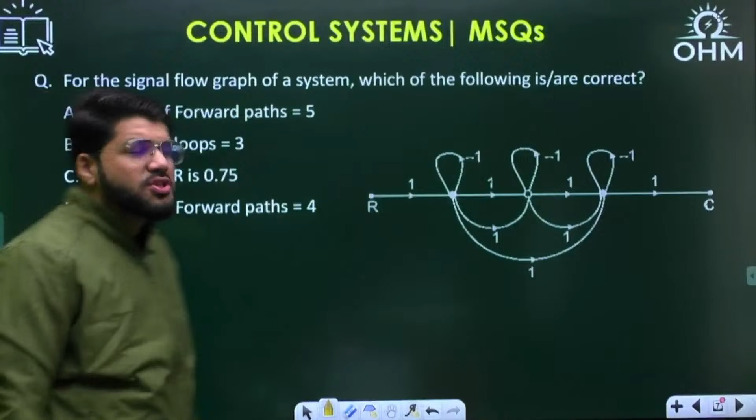For the signal flow graph of a system, which of the following is or are correct? The number of forward paths, the number of loops, and the gain C by R - these are the different parameters discussed in the options. So let us see one by one what are the different number of forward paths.

The different number of forward paths - one of them is quickly the horizontal one, the horizontal path from input to output. Any path from input to the output, you will only travel in the direction of arrows. So any path from input to output is a forward path. Next, to this one branch, to this unit gain branch, there is an alternate. To this also there is an alternate. So let me choose the first alternate, and the second one is horizontal.

Similarly, you can go this way also - these are two more. Rather, I can choose both the alternates only, so this is also the next possibility. This is the fourth one, right? Avinash says fourth, only four. Only four - I can travel through this entire one branch.

This gives me a fifth one also, right? Because that's also in the forward direction only. So the number of forward paths are 5 actually.

Now let's see the other parameters. Loops - how many loops? All these branches are in forward direction, so they will not contribute to the feedback gain. Since all of these are contributing to forward direction, the loop means only there are three loops, and they are self loops only - L1, L2 and L3. So 3 loops and all are self loops, correct? The number of loops is 3.

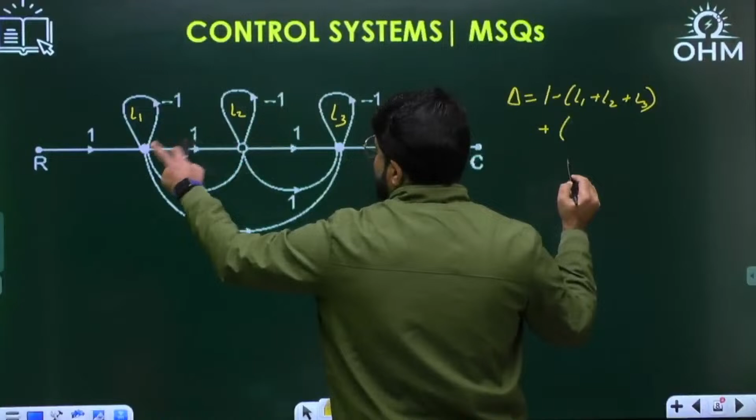Now, all are non-touching to each other. So there are 3 non-touching pairs also: L1-L2, L1-L3 is also non-touching, and L2-L3 are also non-touching. So plus the summation of product of all non-touching loop pairs. Is there a triplet also? Yes, L1, L2, L3 all are non-touching to each other. So there is a triplet, and then alternate plus minus - minus, the products of the triplet term. So there is a triplet L1, L2, L3. This is how you are going to calculate the entire graph determinant.

So this delta will be 1 minus the loop gains, which are minus 1, minus 1, minus 1. So minus 1 into 1, 1 - these product terms will be 1, 1, 1, and minus L1, L2, L3, so minus 1, minus 1, minus 1 is minus 1. So let me see how much it is total: 1 minus minus plus 3, this is also plus 3, and this is also plus 1. The total delta turns out to be 8. The graph determinant turns out to be 8.

Correct? Now path factors - how do we calculate any path factor? Because as per Mason's gain formula, C by R is given by summation of Pk delta K divided by delta. For every forward path, you need to multiply by the respective forward path factor. So how do we calculate any path factor there?

See, you remove that particular forward path. Suppose I erase P1 - suppose this is my first forward path. Let me name the forward paths in this sequence only. Let's say this is 1, 2, 3, 4, 5. Let's write it in this sequence.

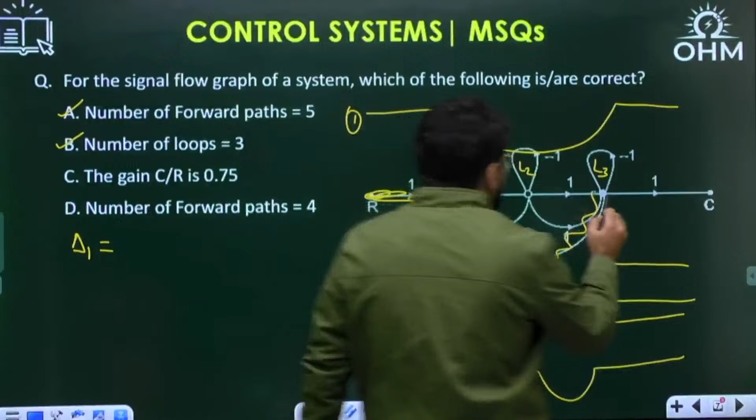So what is going to be the first path factor, delta 1? When I erase this forward path, keep looking with me. Path factor is the determinant of the remaining graph - the remaining graph obtained after deleting that particular forward path. So when I delete it, is there any loop left? Yes, the loop L2 is left. So delta 1 will be 1 minus L2, that is 1 minus minus 1. Delta 1 will be 2.

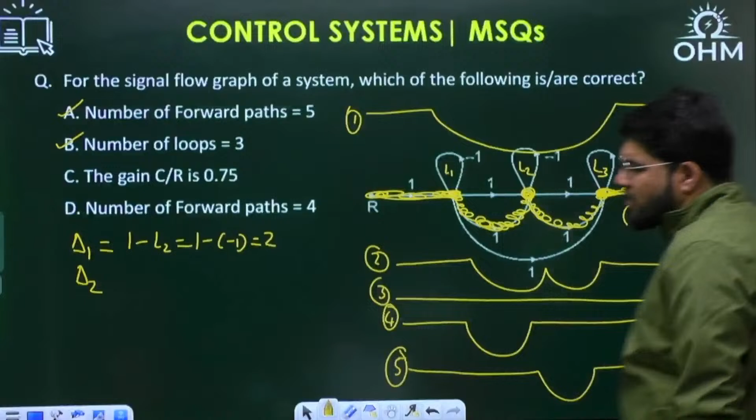Now delta 2 - let me remove this forward path, the second one mentioned here. So when I'm going to remove this, all the loops are now open. These nodes are open means the loops are open. How will the remaining graph be? Something like this - so no loops are closed. If a graph does not have any loop, all the loops are open, then how much is the determinant? 0. So 1 minus 0 - 1 minus sum of loop gains, there are no loops left, so delta 2 will be 1.

Now delta 3 - if I erase this entire horizontal path, then also all the 3 loops are open, so delta 3 will be 1. Delta 4 will also be... now what is delta 4? See here, when I remove this such a forward path.

But ultimately, removing this forward path, L1, L2, L3 all become opens. Their node will go away. So they are open, meaning no loop is left.

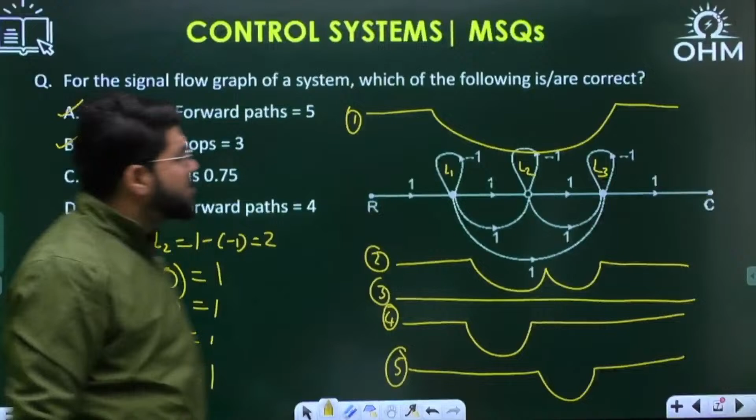Similarly the fifth case also will be 1 only. All the path factors are 1 except the delta 1 case. Whatever the forward paths P1, P2, P3, can we write that down too?

What is my forward path gain P1? It is the product of all the branch gains. Everything is 1 here, so P1 will be 1. Similarly, 1 into 1 into 1 into 1, P2 is also 1. P3, 1 into 1 into 1 into 1, that's also 1. P4 is also 1. P5 is also 1. The values given here are simpler.

So what I need to do is go and substitute here: summation Pk delta k divided by delta. First forward path is 1, all forward paths are 1. Only delta 1 is equal to 2.

The next deltas are also 1, so 1 into 1, 1 into 1, this is the fourth one, this is the fifth one, divided by the value of delta, which is 8. So total answer is 2 plus 4, 6. 6 by 8 is 0.75.

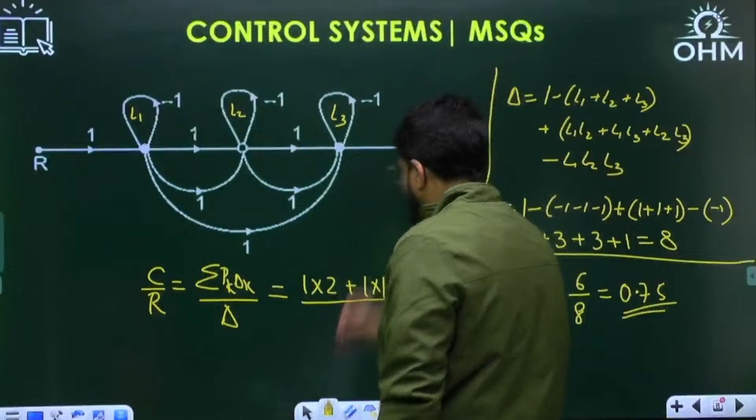0.75, correct, yes Avinash, correct. So the total gain C by R is 0.75. Option number C is correct. Option A, B, C all correct.

Considering this is an MSQ, 3 options are correct here: option A, B, C. Just a little info. The 3 options are correct here. Okay, let us go to the next question then.

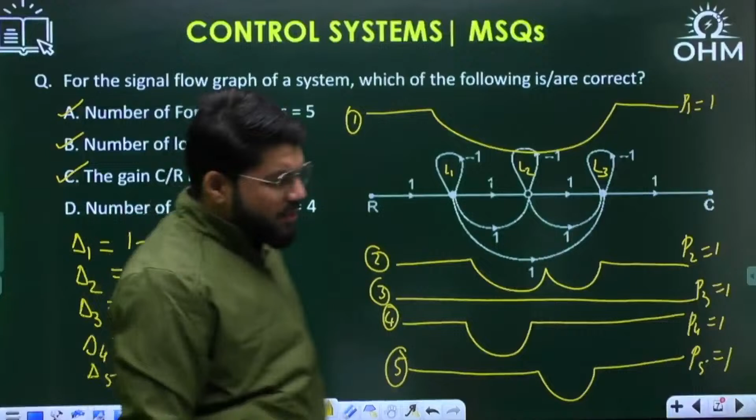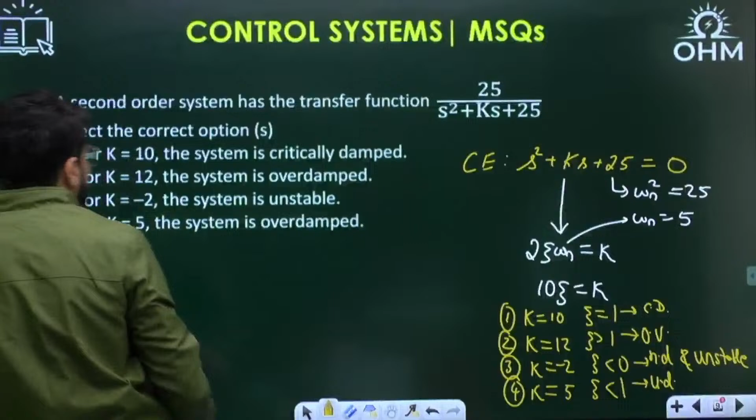Fourth, k equal to how much? 5. K is 5, so zeta is less than 1, positive but less than 1, so it is going to be under damped, not over damped. So again ABC, 3 options are correct here.

Yes, correct answer for this, just a little info, Avinash again. 3 options ABC are correct here. Next question, let's move ahead to the next question here.

Two linear time invariant systems with the transfer functions G1s and G2s are given. They have the unit step responses y1t and y2t respectively. Which of the following statements is or are true?

Dinesh, ABC correct answer. I know one or two GATE MSQs also I have included, just to show you the nature of the control systems MSQs that have come up in recent 2-3 years.

This is a GATE 2022, 2 marks question. There are two transfer functions given, G1(s) and G2(s), with step responses y1 and y2. The options ask: do they have the same percentage overshoot? We know percentage overshoot depends only on zeta. Do they have the same steady state value? Do they have the same damped frequency of oscillation, omega d? And do they have the same 2% settling time?

So what are these formulas? They have the same percentage peak overshoot, which depends only on zeta. The formula is e power minus pi cot phi into 100, where cot phi depends only on zeta. Or equivalently, e power minus pi zeta upon root 1 minus zeta square. Both ways I have written the formula for you now.

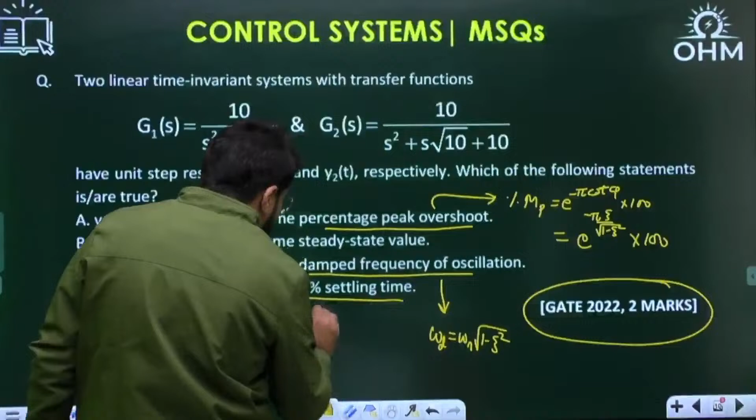They have the same 2% settling time. What is that settling time formula? If it is underdamped, let me check whether it should be underdamped or critically damped. Accordingly, 2-3 different cases I have given to you. Let me start solving it now, and then I'll talk about the steady state value also.

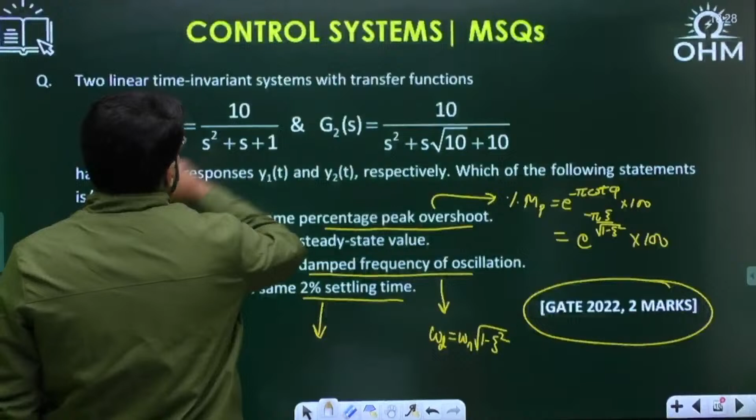So first one, let's talk about G1(s). Taking the transfer function: 10 upon s square plus s plus 1. So omega n square is 1, omega n is 1. And what is zeta? 2 zeta into omega n is 1, so zeta is 1 by 2.

Now coming to G2(s), which is given as 10 upon s square plus s root 10 plus 10. Now omega n square is 10 here, so omega n definitely for both of them is different. Omega n is root 10. And then 2 zeta omega n is root 10, that means zeta is 1 by 2. Same zeta, right? Same zeta.

Both of these zetas are positive and less than 1, meaning underdamped response for both. So I can write down the settling time formula. For underdamped, we know it is 4 by zeta omega n.

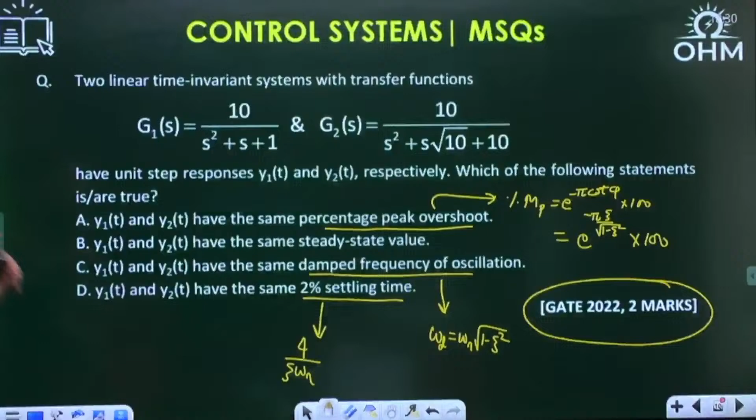Now, do they have the same steady state value? Normally if you express the transfer function in the standard form - omega n square upon s square plus 2 zeta omega n s plus omega n square - the standard second order transfer function, then it has steady state value 1, as we have seen yesterday. But if you express it as k into omega n square, then it will have steady state value equal to k times 1. If you multiply the transfer function by k, the steady state value will also be multiplied by k.

Okay, so omega n square here is 1, and this is 10 into omega n square. So the steady state value of this will be 10 - you can find it by final value theorem, but I'll directly say it is 10. And this one, omega n square is also 10, so this is 1 into omega n square, and for the second case, steady state value is 1. So even the steady state value will not be the same.

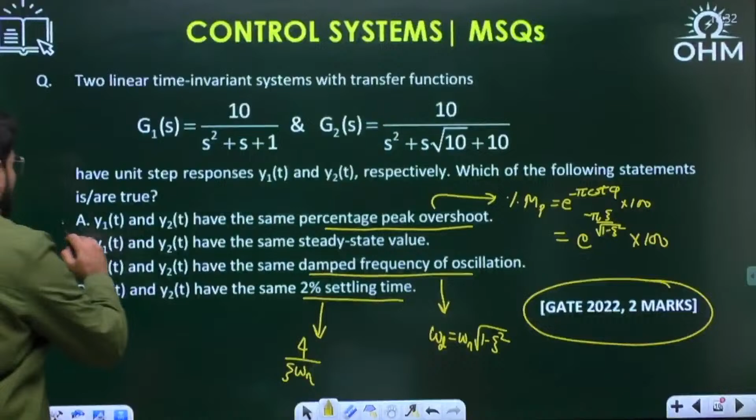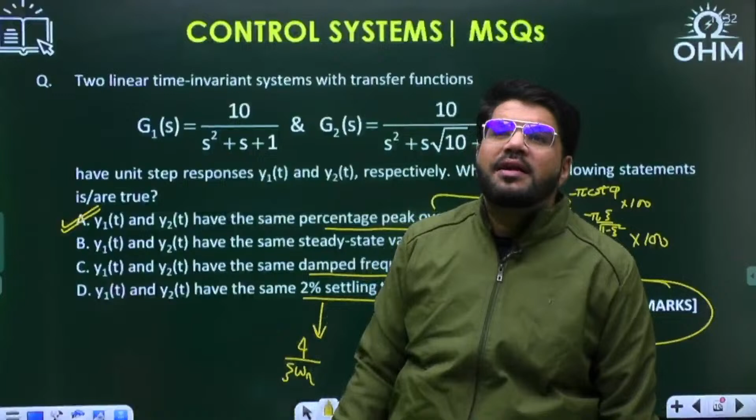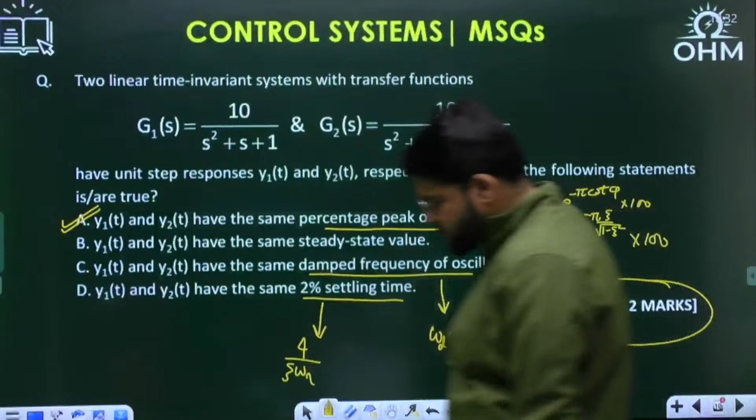So only option A. Although it is MSQ, but what is MSQ? We have seen multiple select questions where they clearly say one or more than one can be correct. Only one correct is also acceptable. Even in the mathematics MSQ class where I was taking GATE mathematics MSQ, I showed you some 2-3 cases where they called it an MSQ question, but only one option was correct. So be ready, don't be puzzled - even in your exam, you may get only one option correct for MSQ. MCQ has a fixed one option correct. MSQ, anything can happen - one correct, two correct, three correct, or all four correct.

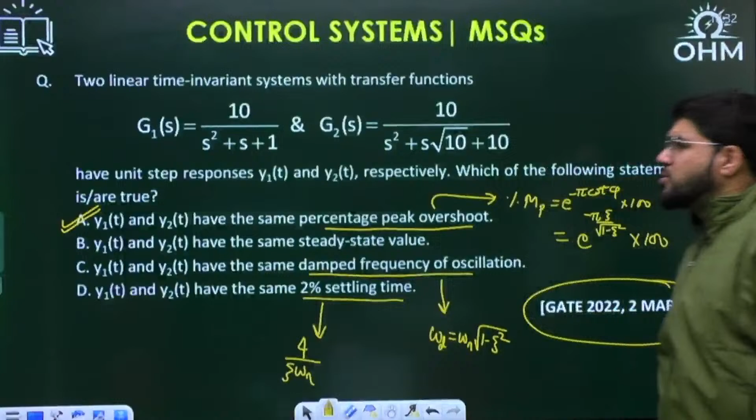Then let's move ahead to the next question - the open loop transfer functions. Yes, Kadiam and Joshna, Dinesh, Lil Info, Murli - correct answer all of you, A. Only A.

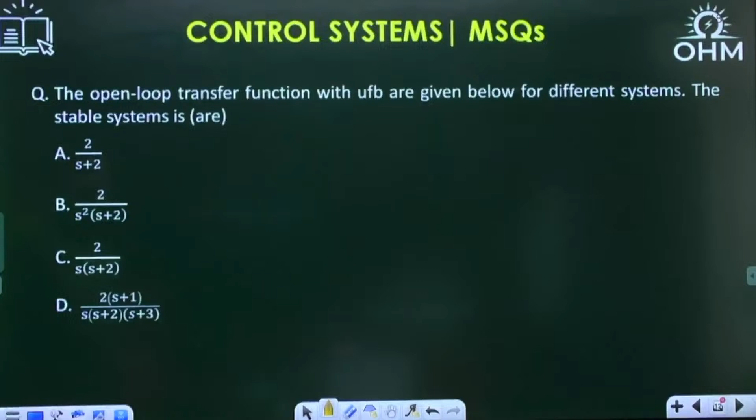So the open loop transfer functions with unity feedback are given below. Which of the systems are stable? See, open loop transfer function normally is G(s)H(s), but what is H(s) given here? Unity feedback - that means the open loop transfer function given here is G(s). So one by one, if I start taking the characteristic equation.

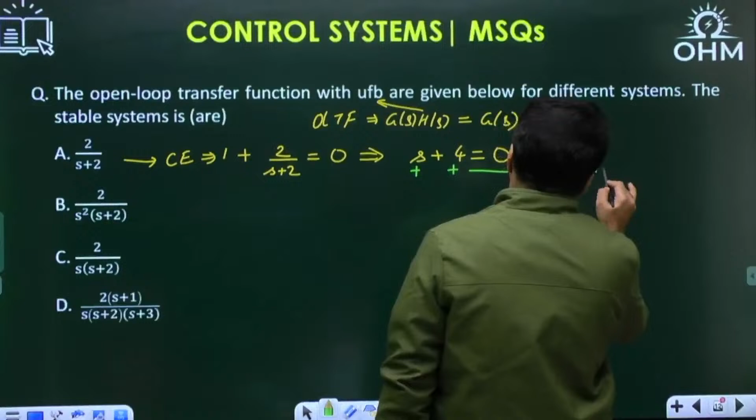Characteristic equation means 1 plus G(s)H(s). So 1 plus 2 upon S plus 2 equal to 0. First order system - when you simplify, S plus 2 plus 2, S plus 4 equal to 0. Is this going to be stable? For first order and second order, what we discussed yesterday in Routh-Hurwitz also - if all coefficients are of the same sign, then the system is stable. Nothing to wonder, right? Plus, plus - same sign. Or you can directly calculate the root. Now what is the root? Minus 4 - that is LHP, so stable. So A is stable.

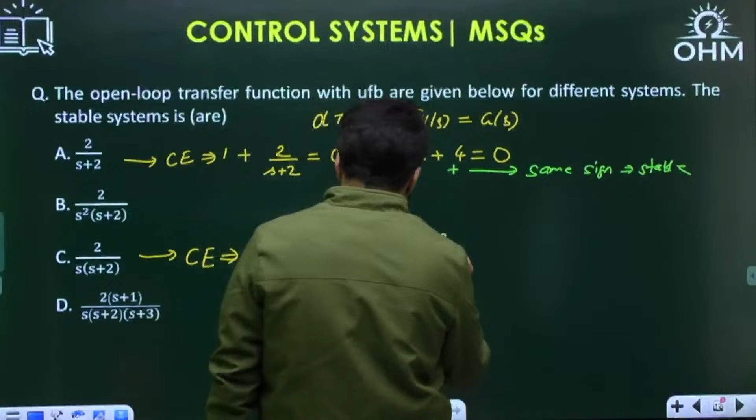Which of them are stable? It's a multiple select question again. Let me go to option C first. So what is the characteristic equation for option C? It is 1 plus 2 divided by S(S plus 2) equal to 0. So S square plus 2S plus 2 equal to 0. Again, second order system, all coefficients plus - for first and second order, all coefficients of same sign is the necessary and sufficient condition. All are of the same sign. Stable, so C is also stable. Or you can check that zeta is positive, so the system is stable - that also you can say.

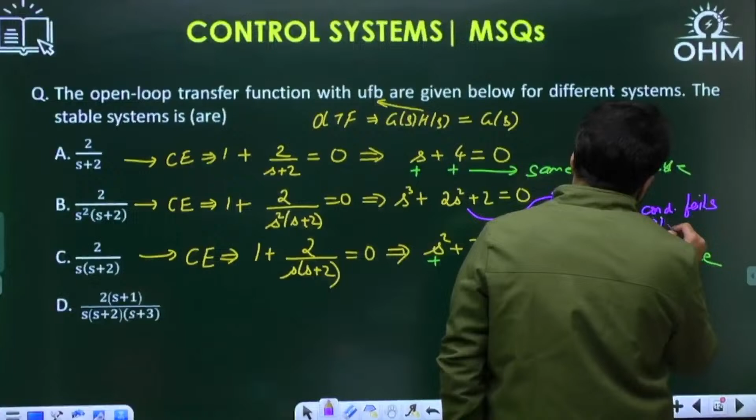Now coming to option B, what is my characteristic equation? 1 plus G(s)H(s), that is 1 plus 2 upon S square(S plus 2) equal to 0. So S cube plus 2S square plus 2 equal to 0. Now you see here the catch is the S power 1 term is missing. If it is missing, that means it has a 0 coefficient. All coefficients strictly of the same sign is required. So what happens if an S power term is missing? Here the S power 1 term is missing, and if it's missing, what will I say? That the necessary condition itself fails. System cannot be stable. So B is not in our list.

See, Avinash says there are two poles of the open loop transfer function - but that is not, I think, the correct way to finally conclude. There are two poles at origin, but of the open loop transfer function, and we need to comment on the stability of the closed loop transfer function.

Right, so take care of that. Now the characteristic equation for the fourth option: 1 plus twice of s plus 1 upon s, plus 2, s plus 3 equal to 0.

Solving this, I should be getting s cube plus 2 plus 3, 5 s square plus 2 into 3, 6s, then plus 2s plus 2 equal to 0. So overall, s cube plus 5s square plus 8s plus 2 equal to 0.

All coefficients are of the same sign? Yes, but this is higher order. Same sign, that means what will I say here? Only necessary condition is met.

Only necessary condition is true. But whether the system is stable or not, for higher order system, we need the sufficient condition in the form of Routh-Hurwitz, or the cubic shortcut.

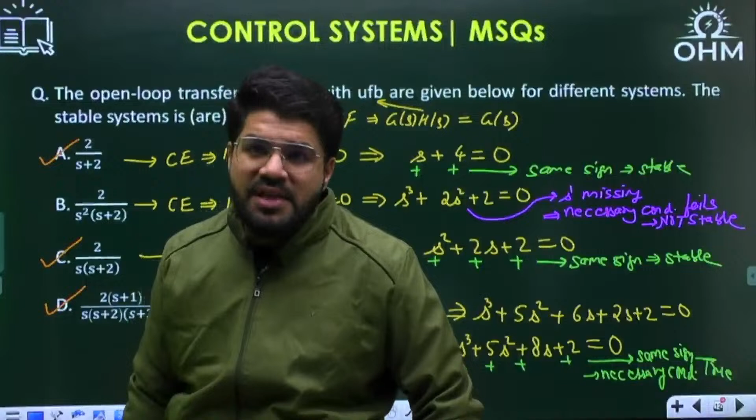If the necessary condition fails, then no need for confirmation from RH. We can say that system cannot be stable if the necessary condition fails. What is that necessary condition? All the coefficients must be of same sign, strictly same sign. If all positive means positive, not even 0. S power 1 term missing means its coefficient is 0, that's what I would say, correct?

Next question. Given the characteristic equation, s power 5 plus 2s power 4 plus 24s cube plus 48s square minus 25s minus 50 equal to 0, fifth order equation.

The number of roots in the right half is 0, right half is 1. The number of roots on imaginary axis is 2. The number of roots in the left half of S plane is 3. Which of the option is correct?

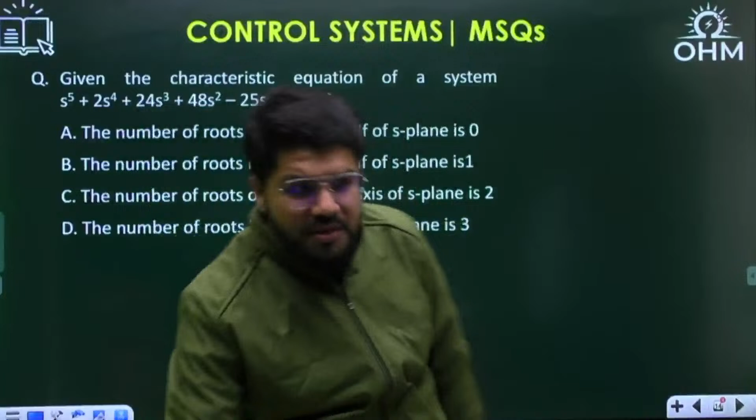Something similar to this I have solved in yesterday's marathon also. Please complete this quickly, guys. Please complete this one quickly.

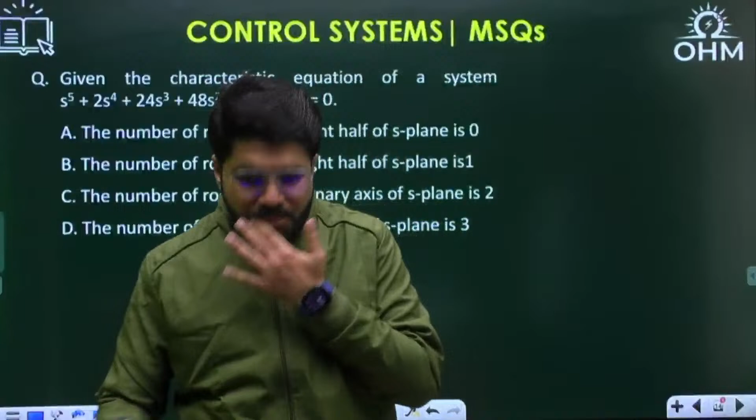Okay, let us check the next answer then.

Fine, so let us form the Routh-Hurwitz first of all, fifth order equation, and let us see what case of Routh is coming up here.

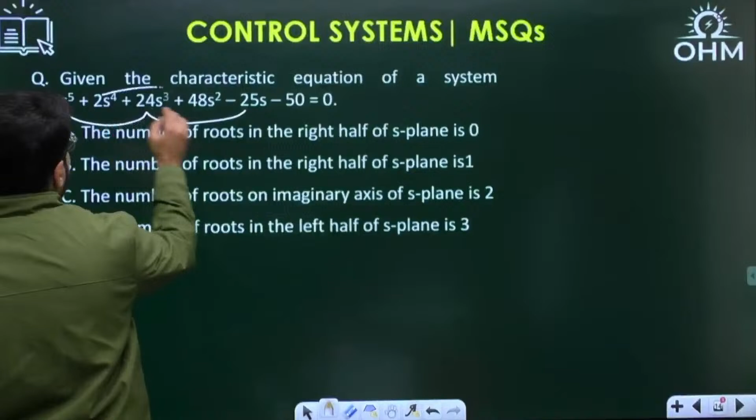Starting with the first two rows, s power 5 and s power 4. S power 5 coefficients: 1, then 24, and minus 25. And then alternate coefficients s power 4: 2, 48, and minus 50.

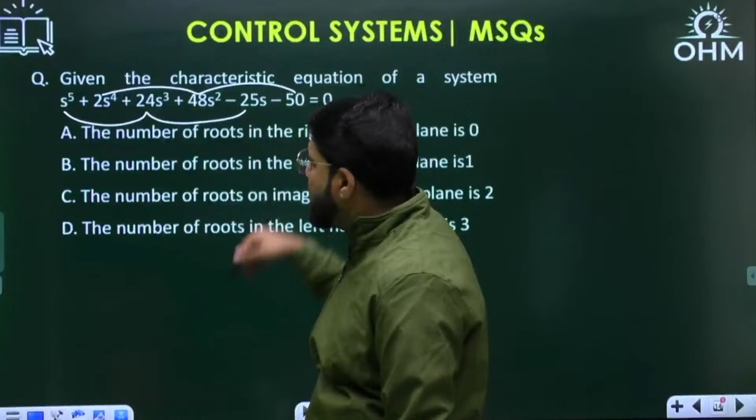So s power 3, see dear, if they are asking about, suppose if they only want the comments on stability, what will you say? You can directly say that all coefficients are not of the same sign, system cannot be stable, necessary condition fails. But I need here actually quantity of roots in the LHP or RHP, so I will go to the Routh-Hurwitz.

I'll have to solve the Routh-Hurwitz. So now s cube row: 2 into 24, 48 minus 48, 0. 2 into minus 25 is minus 50, again minus of minus 50, 0. Last element of a row always 0. So what do you get?

Okay, this is the important case of RH, as I told you, a row of zeros. And whenever there is a row of zeros, we form the auxiliary equation using the row above the row of zeros.

2s raised to the power 4 plus 48s square minus 50 equal to 0. Let me differentiate this. So 8s cube plus 96s equal to 0.

So what is the modified s power 3 row? From the auxiliary equation, we write down the modified s power 3 row. What are the coefficients of s power 3 now? That is obtained from the derivative equation: 8 and 96 and 0.

Now continue with the Routh-Hurwitz in the similar manner. So now s square row will be required. This is now eliminated, don't use the coefficients here. This is replaced: 8 into 48 minus 2.

If you want, you can take 8 common, but let's keep solving. 8 into 48 by 8 anyway will be cancelled. So 48 minus this one, 48 minus 24, correct? 2 into 96 by 8 is 12, so it's going to be 24. 8 into minus 50 by 8: this is minus 50 and this is 0.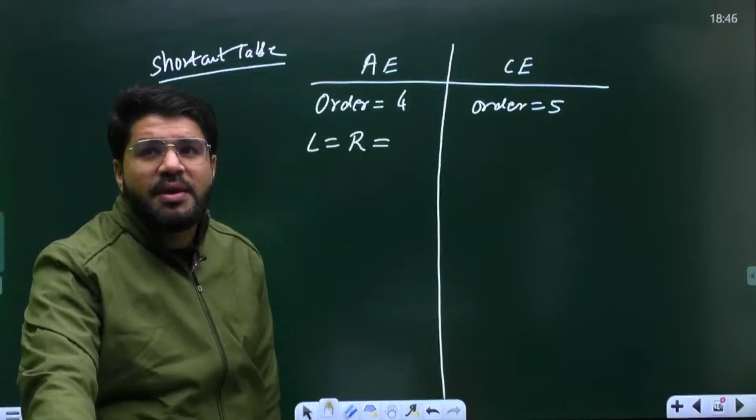For the auxiliary equation, always the number of LHP and RHP roots are same, and equal to the number of sign changes below the auxiliary equation. So in this part, how many sign changes? One sign change.

So in this part, we have one sign change. So L and R are equal and equal to 1. So how many on j omega? Because if there is any j omega root, that is because of the auxiliary equation only. The auxiliary equation is 4th order: one root goes to the LHP, one goes to the RHP. How many left? 2. Now for the characteristic equation, how many RHP roots?

Sequence: first write down R, then j omega, then L. R means the total number of sign changes in the first column. The total number of sign changes overall from top to bottom is also only one sign change. So R is 1.

J omega roots are 2, and L is equal to then 5 minus 1 on the RHP, 2 on the j omega, so LHP roots will be... 5 minus 3, the LHP roots will be 2. And because there are RHP roots, the system is unstable.

Now anyway, let's come and conclude our options. Number of roots on the RHP, 0 or 1? 1. Option B, A is wrong. Number of roots on imaginary axis, 2? Correct, there is a pair. And number of roots in the left half then is 2.

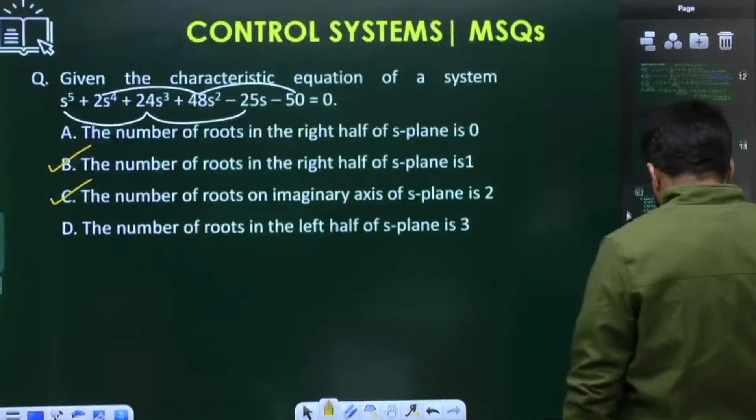So D is wrong. B and C. Yes, B and C correct answer. Right, correct answer B and C. The final correct answer is B and C. Okay, fine.

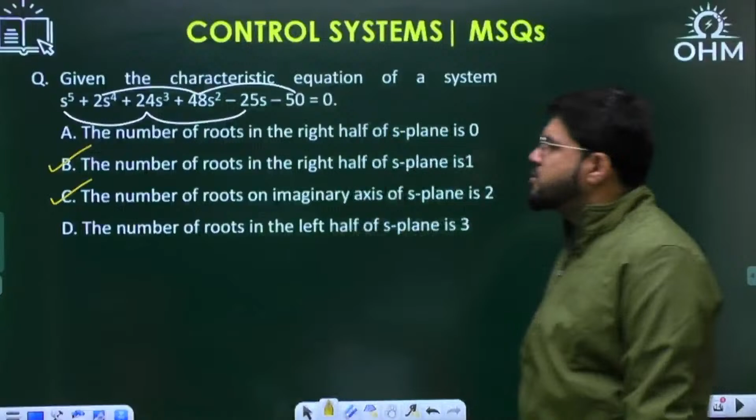Next one. Consider the Bode plot of a minimum phase unity feedback system shown in the figure. Which of the following is or are true? A question on Bode plot of a minimum phase unity feedback system is shown in the figure. Which of the following is or are true?

The steady state error corresponding to the ramp input is 0.25. The gain crossover frequency is 1.4. The final phase of the system is minus 180 degrees. The velocity error coefficient is 2.

Let's check this: the steady state error corresponding to ramp input. If you look into the initial slope of the Bode plot, it is minus 20n if there are poles at origin. It is given as minus 20, so that means n equal to 1. What is this n? This is the one pole at origin.

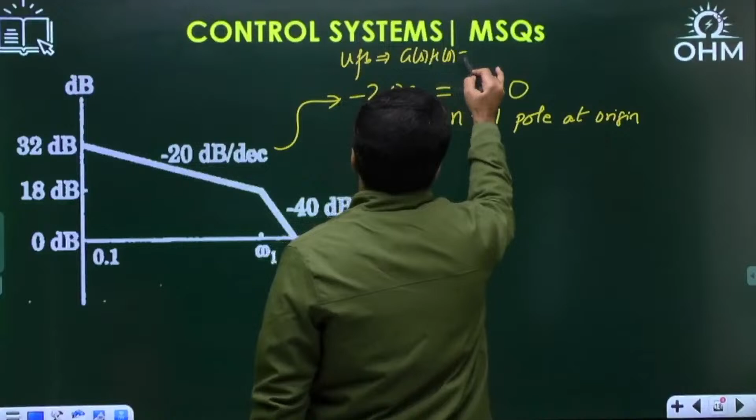Because the system is mentioned to be unity feedback, what is the open loop transfer function? Open loop transfer function GSHS is just GS, since it is a unity feedback system. That means this is one pole of GS at origin, and the number of poles of GS at origin is type 1.

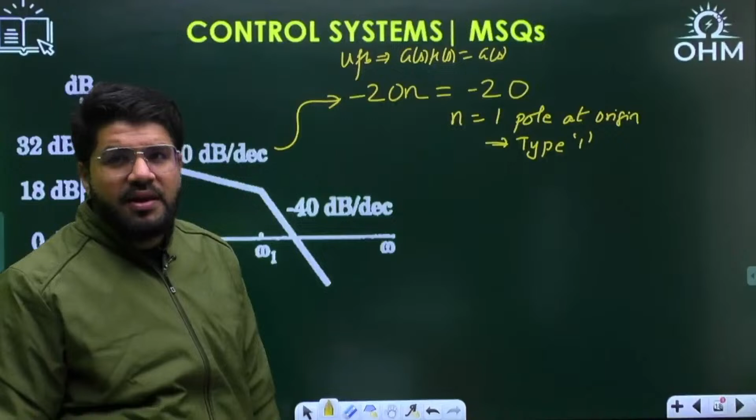Number of poles of GS at origin is known as the type of the system. Type is defined for unity feedback. We discussed the error analysis also yesterday in the marathon session. It is type 1. For type 1 steady state error, if they ask for step, it's 0. If they ask for ramp, we know that type 1 will go with ramp, and for ramp we will get some finite non-zero answer given by 1 upon kV.

If they ask it for parabolic, they can ask it for anything - for parabolic, it will be infinity. So we know these straightforward conclusions: if they ask for step or parabolic, we need not calculate. I think they have asked for ramp, and steady state error for ramp is 1 upon kV.

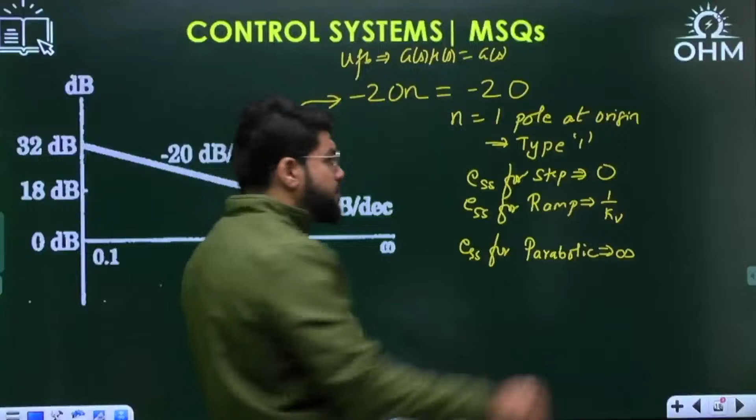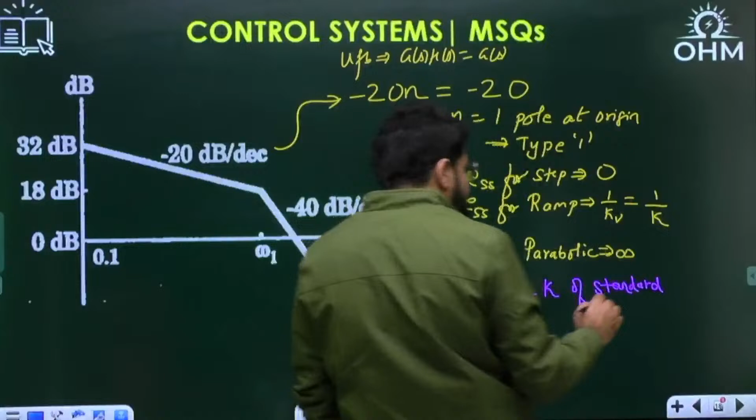kV equal to k - remember always, kV equal to the k of the standard form. And from the Bode plot, we will always write down the standard transfer function. Standard means time constant form.

Let us see what is the value of k from the Bode plot. How do you calculate the value of k from the Bode plot? There are two ways to calculate the value of k from the Bode plot.

Method number 1: initial part formula. Initial part means the part up to the first corner frequency. What is the initial part formula of the Bode plot? The initial part formula of the Bode plot is given by minus 20n log omega plus 20 log k. That is the initial part formula.

Initial part means up to the first corner frequency, that is, up to omega less than or equal to omega 1, the first corner frequency. What is given to me is at frequency 0.1, magnitude is 32. Use omega equal to 0.1 and magnitude given as 32, n is already highlighted as 1. So 32 is equal to minus 20 log of 0.1 plus 20 log of k. Log of 0.1 will be minus 1, so minus becomes plus 20, and then plus 20 log k. So 20 log k is turning out to be 12. You solve it, k will be roughly equal to 4.

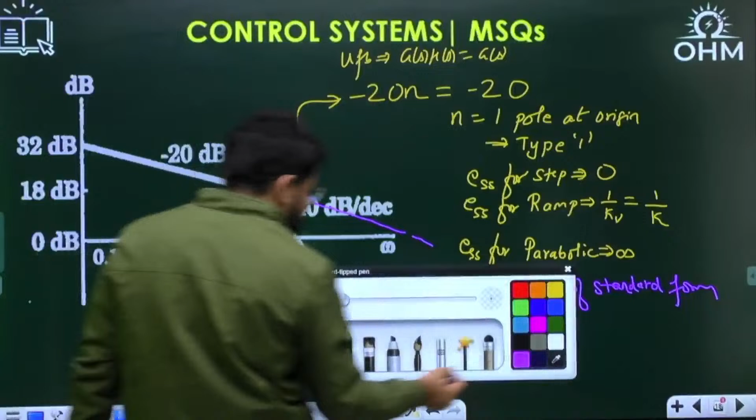If this initial part was extended, if there was no slope change, then it can go and cut the 0 dB axis. So what is this omega equal to? What is this omega equal to?

At the 0 dB axis, you can find this using the concept of slope. What is the slope of this line? Minus 20. The slope of the line is minus 20. What is the slope of any line? Change in the y coordinate.

Y coordinate here is magnitude. Change in the magnitude, M2 minus M1. In any Bode plot formula, you use slope as change in y coordinate, meaning change in the decibel magnitude, over change in x coordinate. Since we plot the Bode plot with respect to log omega, it's log omega 2 minus log omega 1.

This is the slope formula to be used. So if you use it for the minus 20 line with slope minus 20, how much is the change in magnitude? 0 minus 32.

And then change in log of frequency. This is log omega. Let me call it some frequency omega, so it's log omega minus the first frequency. This is the first point I'm using, the frequency here is log of 0.1. Let us call this point A, and this was point B. So I have used the section of the line AB.

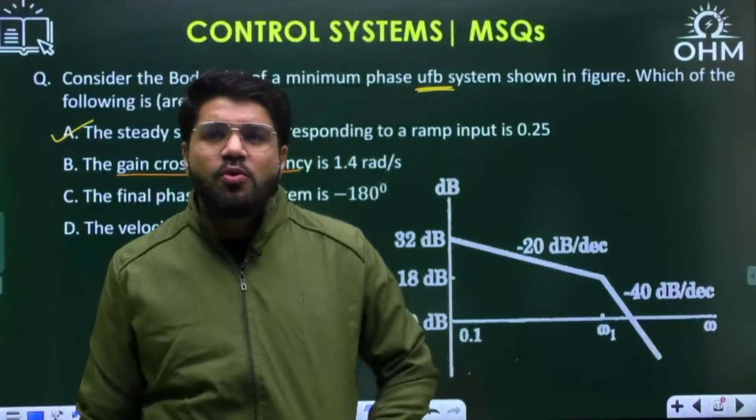Let me first find omega g. What is omega g? Let me first locate omega g within this diagram. It is the gain crossover frequency, the frequency at which the magnitude of gj omega hj omega equals 1, or in decibels. We know that at omega g, mod gj omega hj omega is where the Nyquist plot intersects the unit circle.

In decibels, how much does it become? In decibels, you have 20 log of the magnitude, magnitude 1, and log 1 is 0. So what is omega g? It is the frequency at which the magnitude becomes 0 dB. So where does the actual magnitude become 0 dB? Let me highlight here: this is omega g, this is the actual magnitude plot, where the magnitude becomes 0 dB at this frequency. This is omega g, at this frequency.

So again, going by the slope concept here.

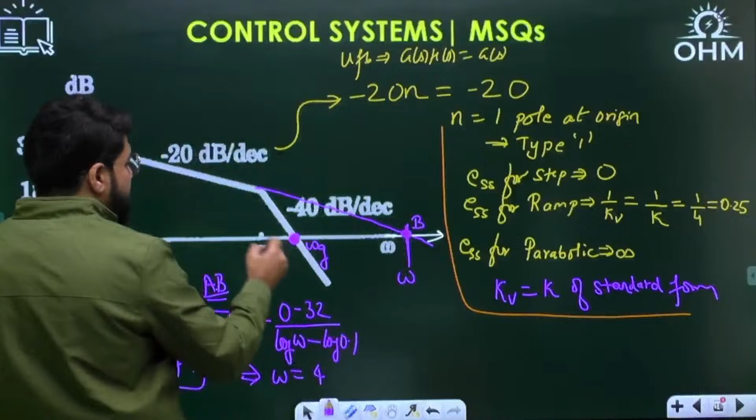This is omega g. So now which line to be used? This was named as B already. Let me name this as some point C. Okay, so use the line CB now. Sorry, C and D, not CB. B is not relevant here. Let's take these 2 points, that is CD, C and D.

But for that I will need omega 1 also. One more effort will be required. We cannot directly find omega g. So 2 calculations will be required here. Little bit calculative it is.

So first I will have to go to AC. Using AC I will first find omega 1. If I go to AC, see how much is the slope for AC? For AC the slope is initial slope only, minus 20. Change in magnitude, this is given. How much is this magnitude?

This is 18. So change in magnitude 18 minus 32, divided by log omega 1 minus log of 0.1. Let me see how much this answer is turning out to be. This is 0.5, just calculations you can do now. So this omega 1 is coming out to be 0.5.

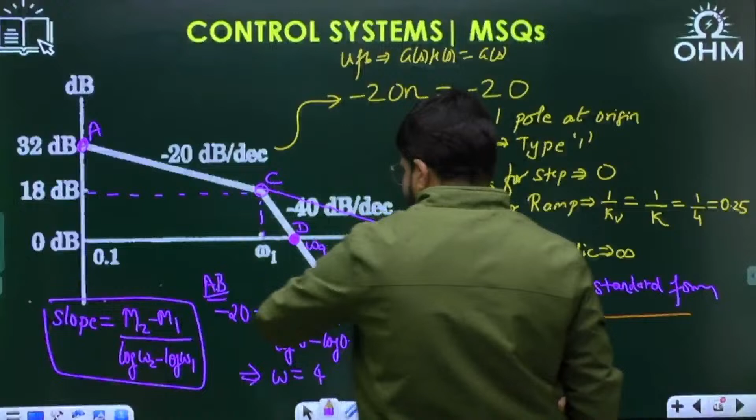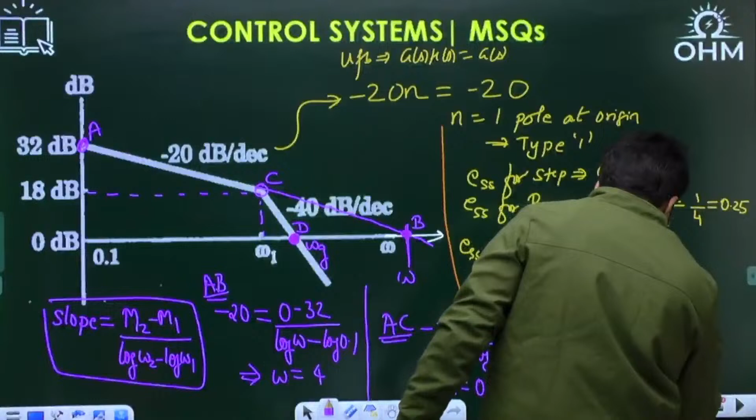Now I will go to CD. The slope is minus 40. Change in magnitude 0 minus 18, divided by change in log of frequency, that is log of omega g minus log of omega 1. Omega 1 is 0.5, log of 0.5. So this was also indirectly required, omega 1, which I have calculated.

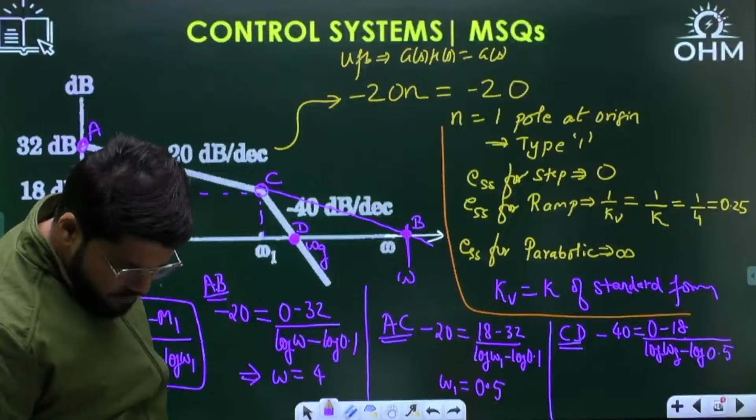Omega g is approximately 1.4. Correct, so B is also correct.

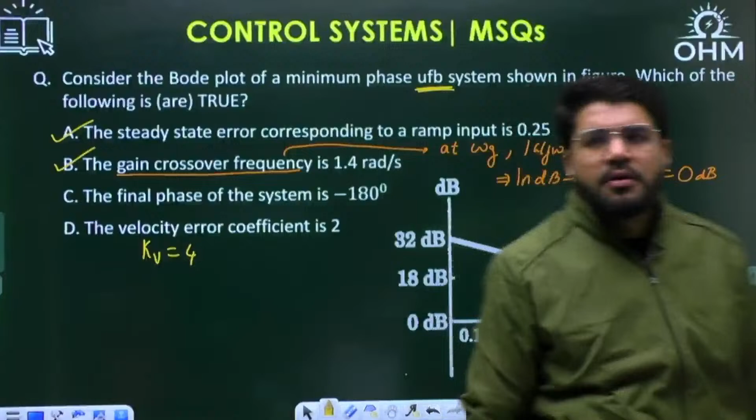So the correct answer here is B also. And then we are left with C.

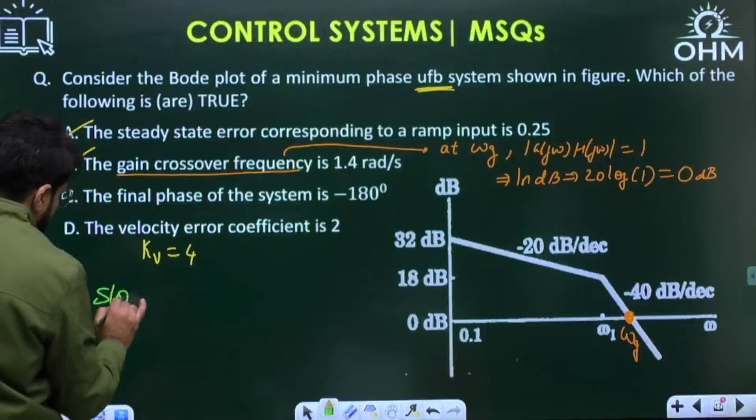Final phase is a simple task only, because what is the final slope? It is given to be minimum phase system. The final slope is always, whether minimum or non-minimum phase, minus 20 into P minus Z of the Bode plot, which is shown here as minus 40. So what is the value of P minus Z is equal to 2.

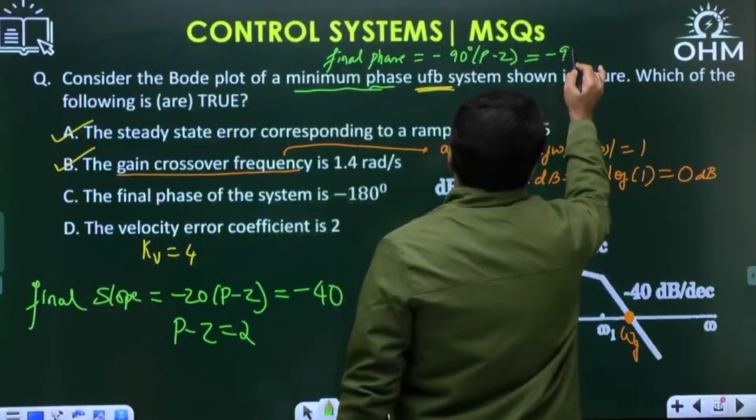Now for a minimum phase system, final phase is given by minus 90 degree into P minus Z. So P minus Z is already obtained as 2, so minus 180 degree. So yes, final phase is minus 180 degree, so C also correct. A, B, C all 3 correct. Just recheck, B is also getting to be correct only. A, B, C, 3 options are correct.

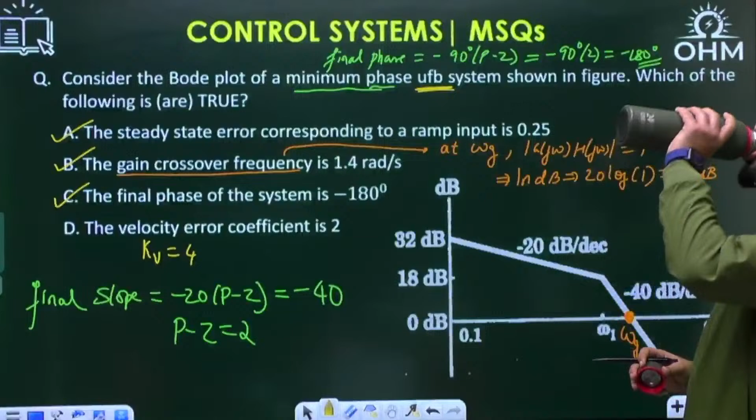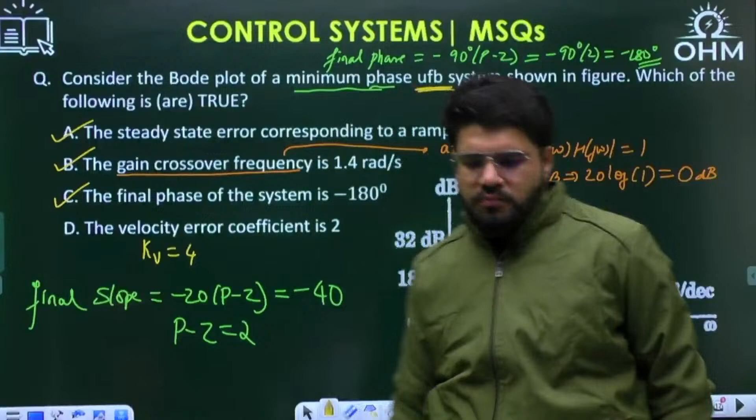Next question. The asymptotic Bode magnitude plot, another one, is shown. It is a type 2 system. It has 2 poles and it has 2 zeros and 3 poles. Final transfer function also they are asking, and there are 3 poles at the corner frequency omega equal to 10. Let's check it.

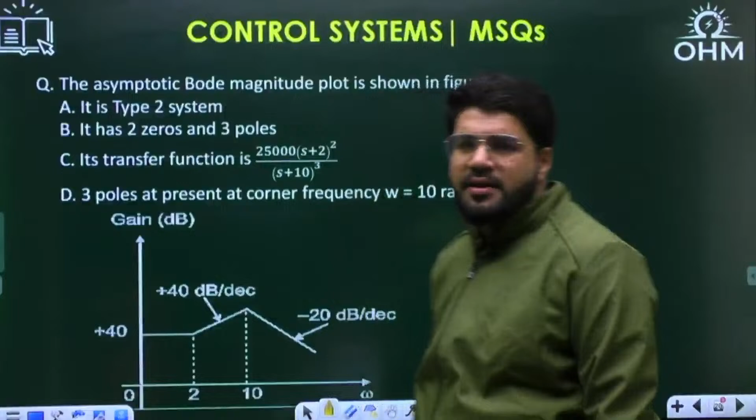First of all, it is definitely not a type 2 system. The asymptotic Bode magnitude plot for unity feedback system, let me be more specific in the question. For unity feedback system is shown. Now see, what is the initial slope?

You talk about this portion, and what is the initial slope? The slope is 0 because the line is parallel to the x-axis. Initial slope 0, and if initial slope is 0, n equal to 0, pole at origin. There is no pole at origin or neither zero at origin. There is no pole or no zero at origin. Let me not only say pole, because initial slope positive means zero at origin.

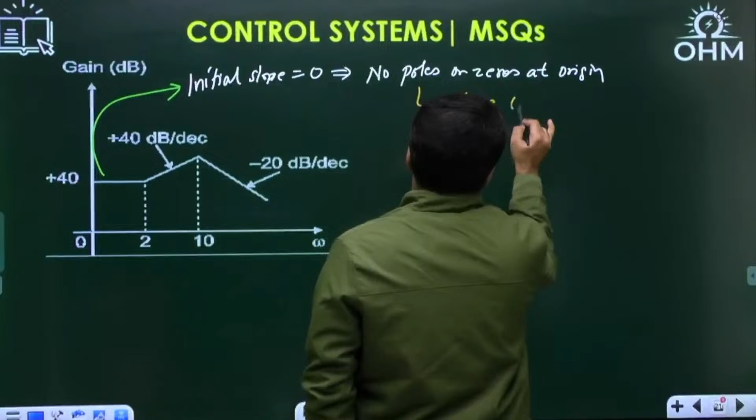Initial slope 0, that means no poles or zeros at origin. So at origin there is nothing, no pole or zero. But no pole at 0 indicates type 0. So it is definitely not type 2. This is wrong.

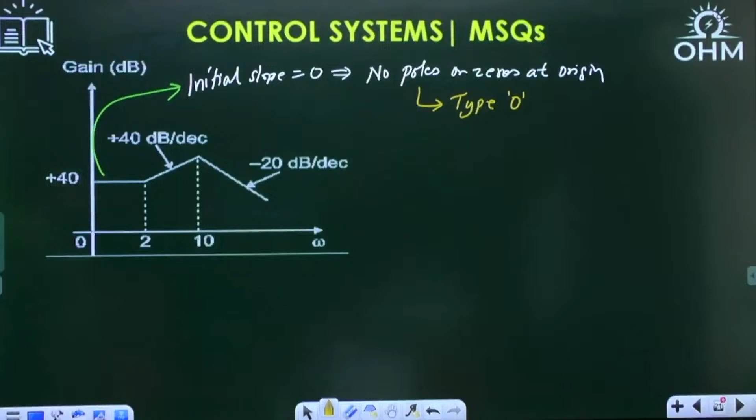Now what are my slope change points? This is the first point where slope will change, and slope becomes positive. A positive change of slope is due to a zero. Due to a single zero, slope changes by 20. But due to 2 zeros, slope change can occur by 40, the slope changes 40 decibel per decade. So we will have 2 zeros here.

2 zeros at what corner frequency? Corner frequency will be 2. Then how much is the slope change here? 40 to minus 20, see, slope change will matter. How much is the slope change here?

Minus 60, minus 20, minus 40. When you reduce by 60, you get minus 20. The slope suddenly changes by minus 60, which means there are 3 poles at the same corner frequency. What is this corner frequency? That is equal to 10.

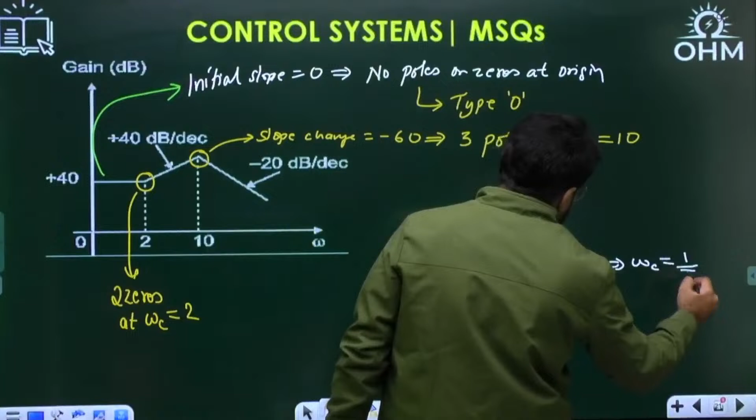Now for any term 1 plus sT, whether it is 1 plus sT or 1 upon 1 plus sT, the corner frequency is given by reciprocal of time constant. So what is the time constant for the pole? The time constant is 1 upon 10, or 0.1. And for the zeros, the time constant is 1 upon omega c, 1 by 2, or 0.5.

There are no poles or zeros at origin. So how should my transfer function look? They're asking for the transfer function also. It has 2 zeros and 3 poles. As of now that's correct, because there are no poles at origin, no zeros at origin. So 2 zeros and 3 poles, this is correct, and 3 poles at the corner frequency omega equal to 10, that is also correct.

At omega equal to 10, 3 poles. Now the transfer function is given in non-standard form, we can handle that too. But finally, how generally will you express that transfer function? I can express it as k into the zero terms. I know the corner frequency and there is a repeated zero, 2 zeros.

Divided by s power n, but s power 0, there is no pole or zero at origin. So directly the pole term, suppose 1 plus sTn, 3 poles, so cube. Then the values, what is the time constant? For zeros it is 0.5, or let me write it as 1 by 2. And this Ta is 1 by 10. For the pole, the time constant is 1 by 10. What is unknown is k. So before finding k, we cannot write down the answer.

Avinash says k is 100. Let us see what is the k. Again, to find out the value of k, go to the initial part formula.

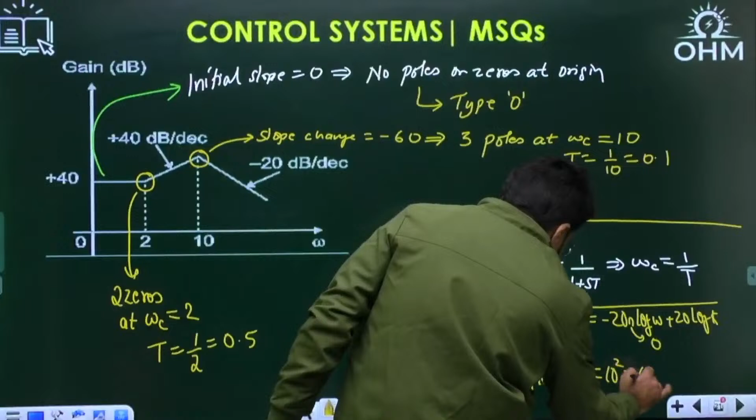So I'll just substitute the value. My transfer function would be 100, 1 plus s by 2 whole square, divided by 1 plus s divided by 10 whole cube. They are given in non-standard form, s plus a format, so no problem. 100, now this s by s by 10, this 10 cube will jump to the numerator, and from here 2 square will come. Then this term is s plus 2 whole square divided by s plus 10 whole cube. So correct, 100 by 4 is 25, and 10 power 3 is 1000. So correct answer: 25,000 times s plus 2 whole square, upon s plus 10 whole cube.

So option C is also correct. B, C, D, three options are correct here. That is B, C, D.

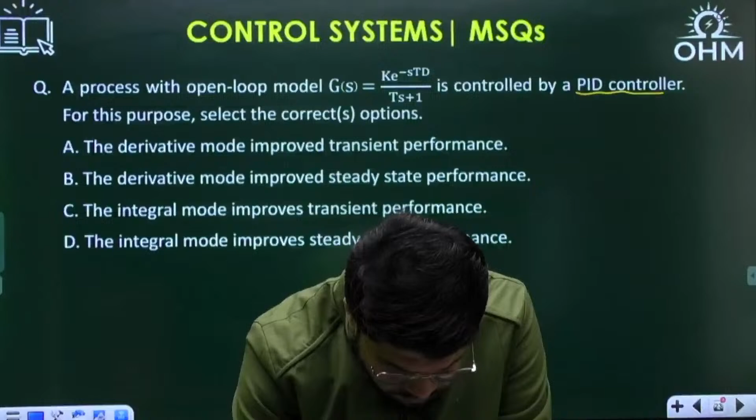Let's move ahead to this question. PID controller: the derivative mode improves the transient performance or improves the steady state performance?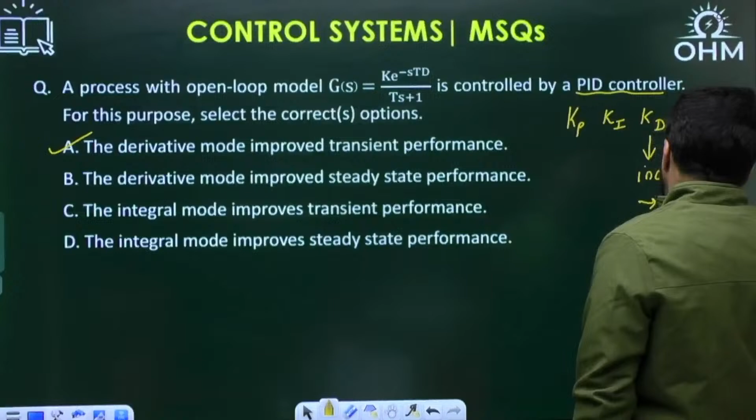The derivative mode will always improve the transient performance. So when I talk about PID, there are 3 constants: proportional Kp, integral Ki, and derivative Kd, which will increase the value of zeta. Because zeta increases, it decreases the overshoot. We know that if zeta increases, overshoot will decrease, and it improves the transient performance by reducing the fluctuation.

The integral part will always improve the steady state performance. It increases the type of the system, and hence the steady state error will reduce, actually reduce significantly. It improves the steady state performance, A and D. Right, so these are just one example. There are a lot of questions that can lead to direct conclusions with respect to the controllers that can be discussed.

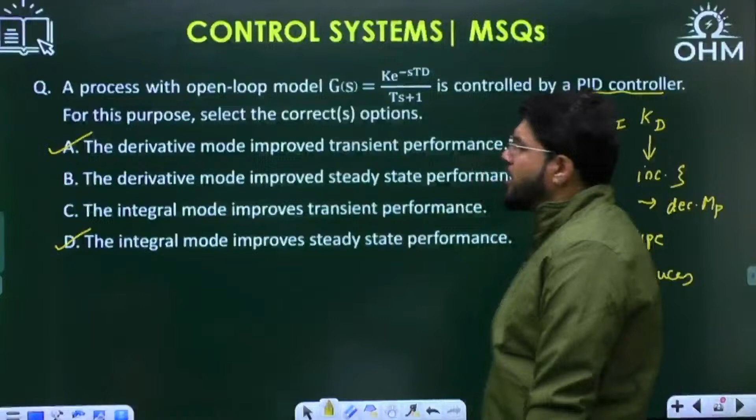A compensator has the transfer function G(s) given to you.

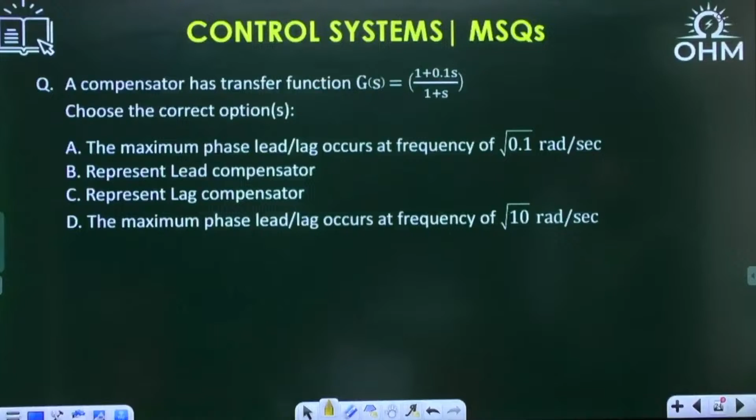First, you have to identify whether it is a lead compensator or a lag compensator. This itself is a normal standalone question many times. Identify whether it is lead or lag, and what about the pole and zero?

The zero will be at minus 1 upon 0.1, that is minus 10, and the pole is at s equal to minus 1. So is it pole dominant or zero dominant? First the pole is coming, and then the zero.

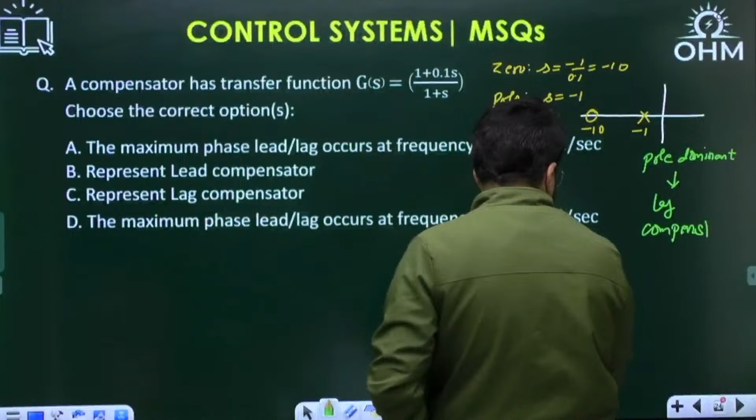Pole dominant means lag. The pole is closer to the origin compared to the zero, so pole dominant means it is a lag compensator, not the lead one.

It is a lag compensator, and the lag compensator can generally be expressed by the transfer function 1 plus sT upon 1 plus s beta T. Comparing this with what is given, 1 plus 0.1s divided by 1 plus s, on comparison the time constant T is 0.1.

Beta into T is 1, so beta into 0.1 is 1. So what is the value of beta? 1 upon 0.1, beta equal to 10. So beta will be equal to 10.

Now what is the maximum phase lag, and at which frequency does it occur? It will be phase lag actually. These are the two formulas producing questions normally from this.

Maximum phase lag phi_m is given by the formula sine inverse of 1 minus beta upon 1 plus beta — of course take the magnitude since we are calling it a lag term. And it occurs at frequency omega_m given by the formula 1 upon T root beta.

Right now they are only asking for omega_m. So what is that omega_m? For the current question, omega_m is 1 by T into root beta. What is the value of T? T was 0.1 into root 10, so it's like 10 by root 10.

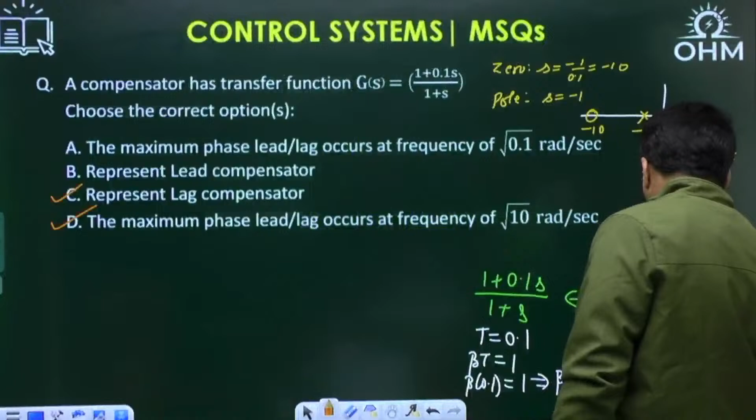Even if it is a lead compensator, in the standard form 1 plus sT upon 1 plus s beta T, beta will be greater than 1 for lag. But the point is, even if it is a lead compensator, these formulas will not change. Phase lead compensator is the one which has zero dominance.

It has zero dominance. Its transfer function is represented in a similar format, 1 plus sT divided by 1 plus s alpha T, but alpha will be less than 1. And the phi_m formula is similar: sine inverse of 1 minus alpha upon 1 plus alpha, which will be known as the maximum phase lead provided by this compensator.

And the value of omega_m also uses the same formula, 1 upon T root alpha. So phi_m and omega_m use the same formulas for both cases. Phase lead means zero dominance, or in the standard form 1 plus sT upon 1 plus s alpha T with alpha less than 1. Lag means pole dominance, or in the standard form 1 plus sT upon 1 plus s beta T with beta greater than 1. These are the formulas.

Next, a GATE 24 2 marks MSQ question from state space modeling. Consider a system S represented in the state space as...

If you have followed any of my earlier classes, I have always told you the standard state space model, the canonical forms of the state space models are always very important. Is this any of the standard form? When I talk about state space model, the standard forms, also known as the canonical forms, are very important. There are 4 standard forms you will normally always remember: CCF, OCF, DCF and JCF. The DCF and JCF are also referred to as the normal forms. These will only come under the parallel decomposition case.

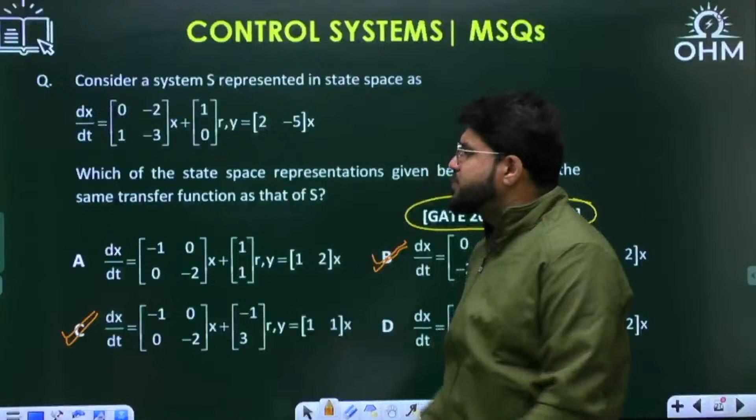With this, I have quickly revised 3 important state space forms for you, the standard state space forms, and they are respectively CCF, OCF, and DCF. JCF needs repeated poles, so that was not there in this question. That is why we cannot talk about the JCF for sure 100%.

DCF also, please remember, in the DCF, matrix A is always a diagonal matrix. That is why we name it as diagonal canonical form. Matrix A is a diagonal matrix with non-repeated poles. I told you both the poles should be distinct, non-repeated, with non-repeated poles or with non-repeated eigenvalues.

1 or 2 more points I will add. So normally a state space model, whether it is OCF or DCF or JCF, anything, the general way of writing the state space model is x dot equal to AX plus BU, Y equal to CX plus DU. So what is the characteristic equation of matrix A?

Characteristic equation of the matrix A, that we learn in linear algebra, and that is given by determinant of A minus lambda I equal to 0. The roots of the characteristic equation are known as lambda, which are eigenvalues. The characteristic equation of the matrix is always identical to the characteristic equation of the control system. So we write the characteristic equation of the control system also as determinant of A minus SI, or in standard form, determinant of SI minus A equal to 0, and the roots of the characteristic equation of the control system are the poles of the system.

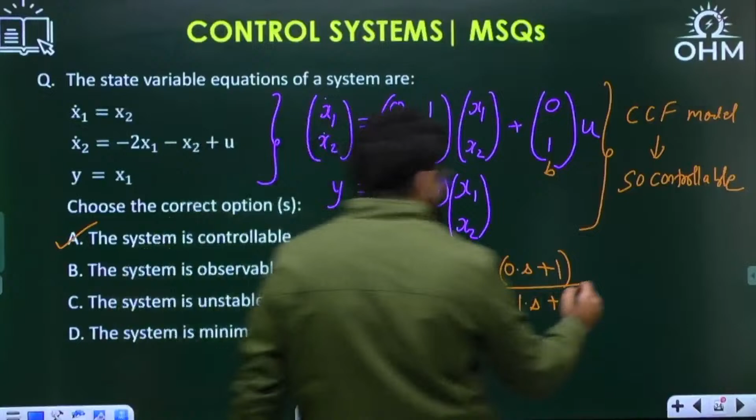So what is my transfer function? See here. 1 into... what is C0? C0 means the constant of the numerator. C1 is the coefficient of s, so it's 0 into s, divided by minus a0 minus a1 — a0 means the constant — plus 1 into s, plus s square. So my transfer function is 1 upon s square plus s plus 2.

Now, when the question is in CCF form and if there is no pole-zero cancellation, it is observable. Is there any pole-zero cancellation? There is no zero only, right? If there was a zero, we would check whether it can be cancelled with a pole or not. So there is no pole-zero cancellation.

So it is observable also. If the system is in CCF form, it is always controllable, and if there is no pole-zero cancellation, it will be observable also. For both of them, you can skip the Kalman's test.

Where to apply Kalman's test, where you can skip it, where to apply Gilbert's test — that is only for normal form. I told you yesterday also, if you want the complete details of controllability and observability for 100% of all types of cases, you can watch my video from just 1 or 2 weeks back, where I covered controllability and observability in 2 videos — one for Kalman separately, one for Gilbert separately. So it is observable also, B correct.

Now, minimum phase or stability, instability — suppose this is alone a question. What do you have to do? No need to write down the entire transfer function.

Here I have written, but if the question is only on stability or minimum, non-minimum phase, you can directly calculate the poles by the eigenvalues. So you can directly try to calculate the eigenvalues of the matrix here. But right now, since transfer function effort is done...

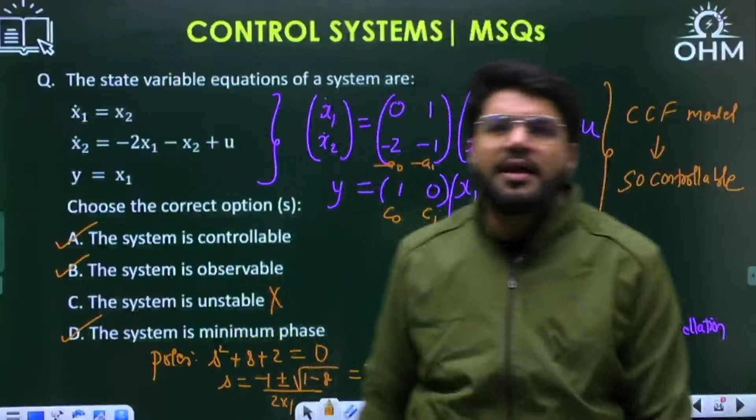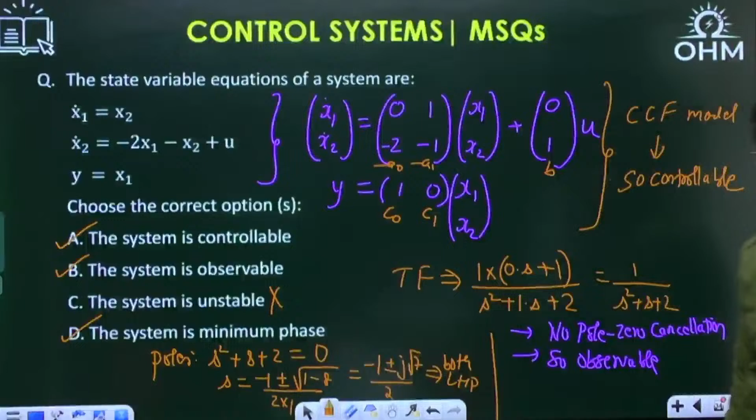So ABD is the correct answer for the question. ABD is the correct answer for this particular question. Clear?